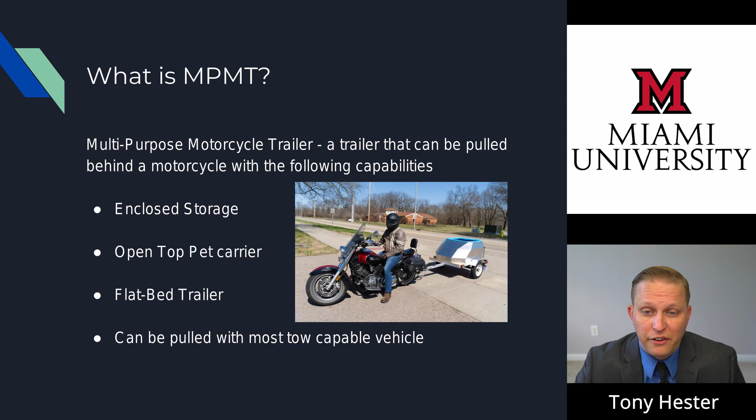During research, I could not find any products that matched what I was looking for. Products found were either bulky or made completely out of fiberglass and would provide no protection to the pets in case of an accident. Because of this, we thought it would be good to design our own trailer.

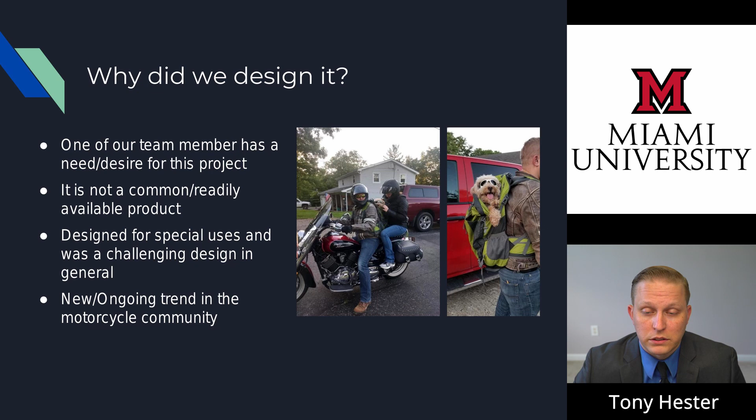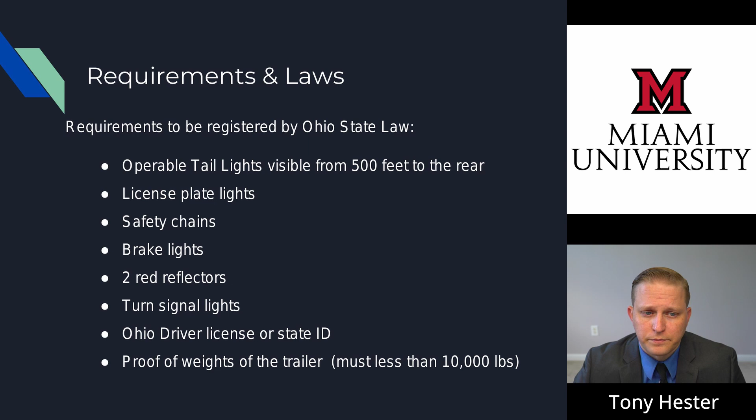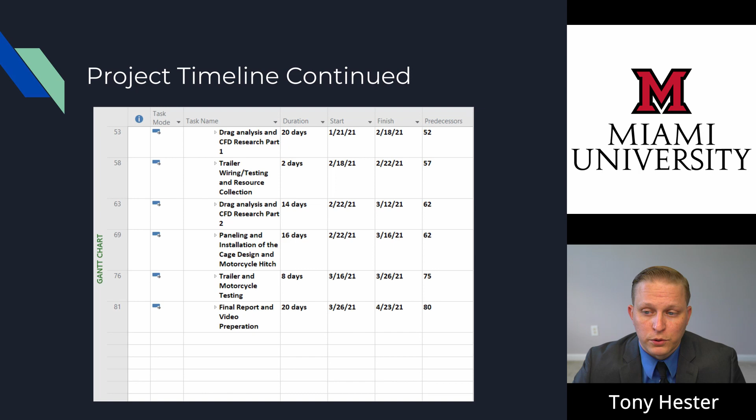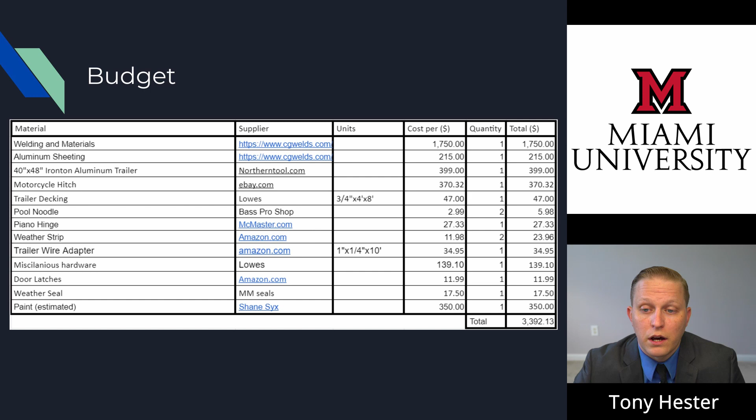We designed a scaled trailer model that was modeled to be a replica of the actual trailer, and this was done inside Autodesk Inventor. The structural cage was designed using Autodesk Inventor's cage design feature.

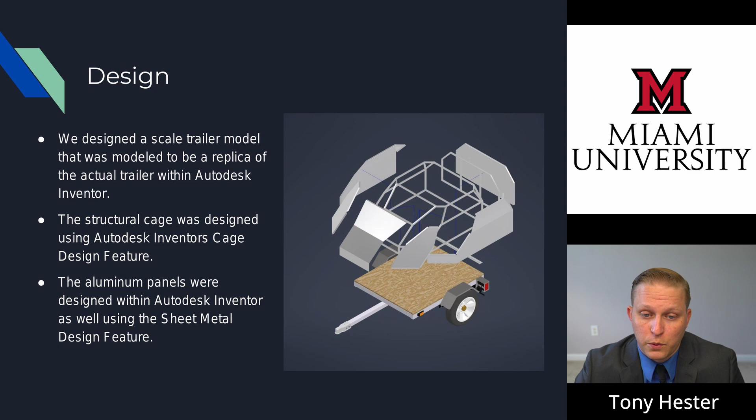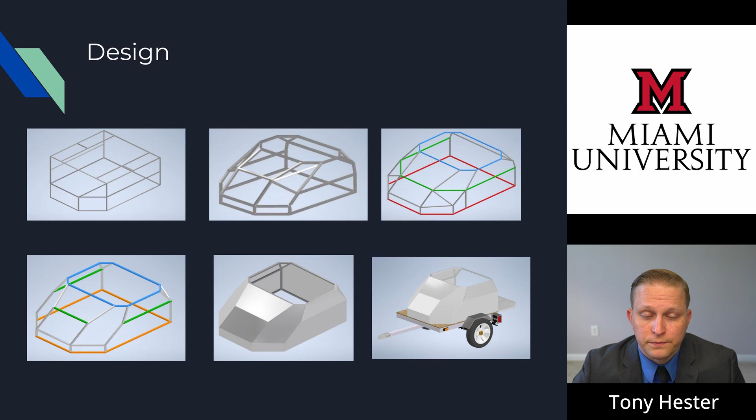The design has a skeletal cage comprised of 3/4-inch aluminum square tubing and 20-gauge aluminum sheeting. The cage can be easily attached and removed from the trailer by one person. A lid was designed so that we could use the trailer for dry storage, and a tailgate was designed to allow safe and sturdy loading of the animals.

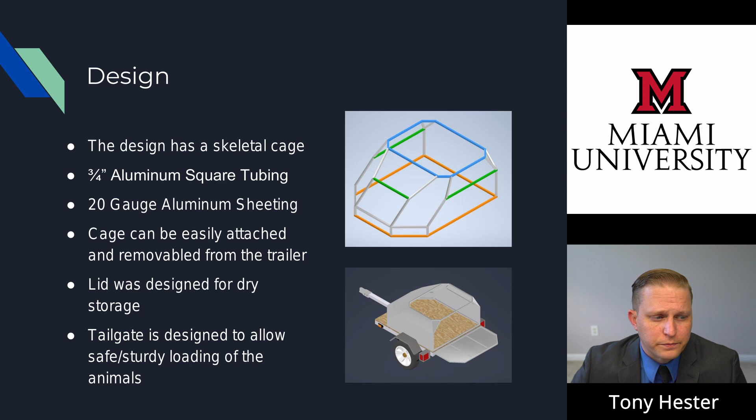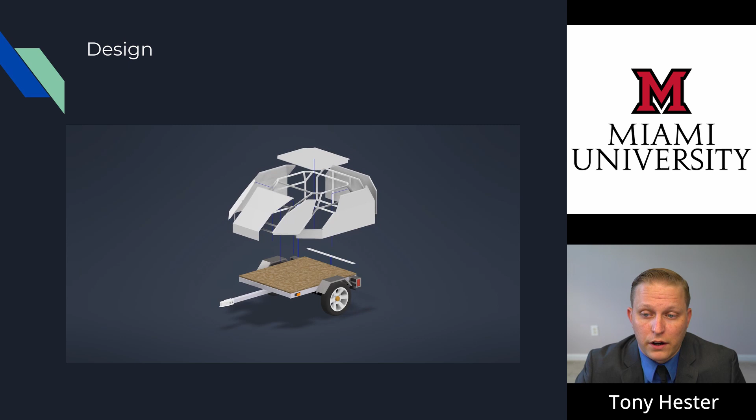This video shows an animation of the exploded view involving all of the components of our design inside Autodesk Inventor. Next, William will discuss the assembly process.

For the assembly process, the hitch was purchased and is specifically designed for a Yamaha V-Star 1100 motorcycle. The hitch was installed to the frame of the motorcycle.

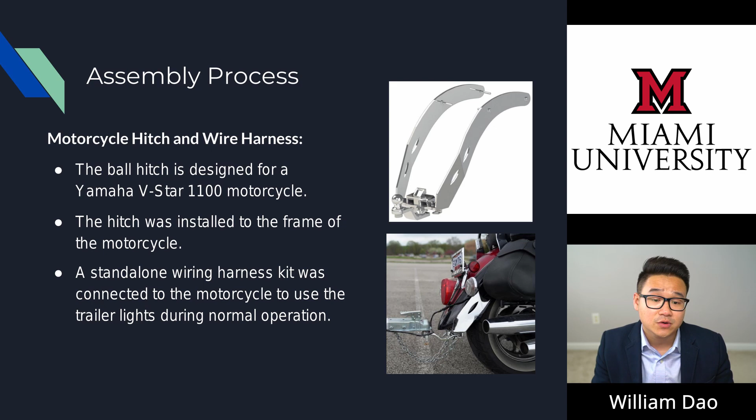The ball hitch allowed the motorcycle to have a good amount of lean angle when turning. A standalone wiring harness kit was connected to the motorcycle to use the trailer light during normal operations.

For the trailer assembly, we purchased a 40 by 48-inch pre-built aluminum trailer kit from Northern Tool Equipment. The trailer kit came with reflectors, running lights, license plate lights, signal lights, brake lights, and a wiring harness.

We soldered the wiring harness for the lights, heat shrink wrapped them, and securely tightened them to the trailer frame. We put a 3/4-inch thick weather-resistant plywood on top of the trailer to use as the trailer base.

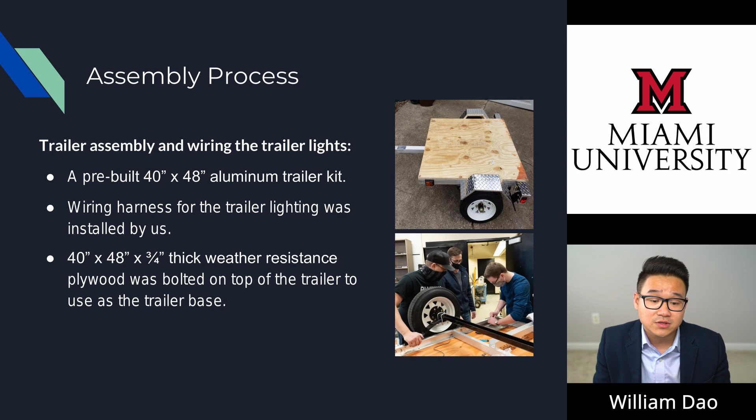Moving on to the cage frame assembly. The cage fabrication was outsourced to CG Welds for welding using 3/4-inch square aluminum tubing.

Additional 3/4-inch aluminum flat bar was added to the cage to provide more support for the aluminum panels. We added a total of 4 1.5-inch square tabs to the bottom of the cage to securely bolt down the cage to the trailer baseboard.

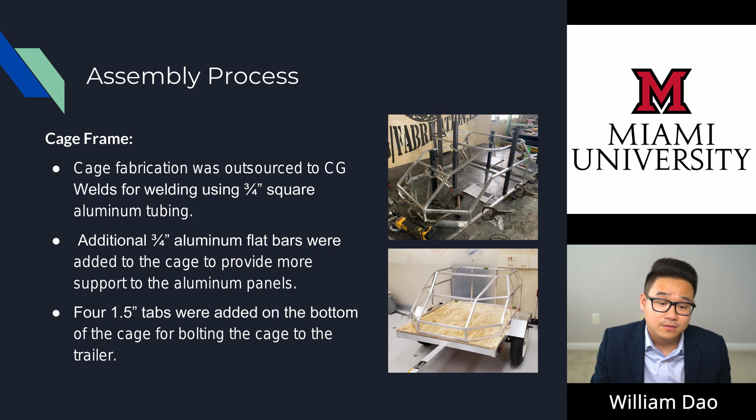Moving on to the panel assembly. The first attempt of making the panel template was using cardboard to form around the cage frame. This was a failure because the cardboard was very flexible, but we did learn a lot during the process.

The final attempt of making the panel template was using poster board instead of cardboard. This gave us a more accurate fit and dimension of panels. We then traced the template on a 20-gauge aluminum sheet for cutting.

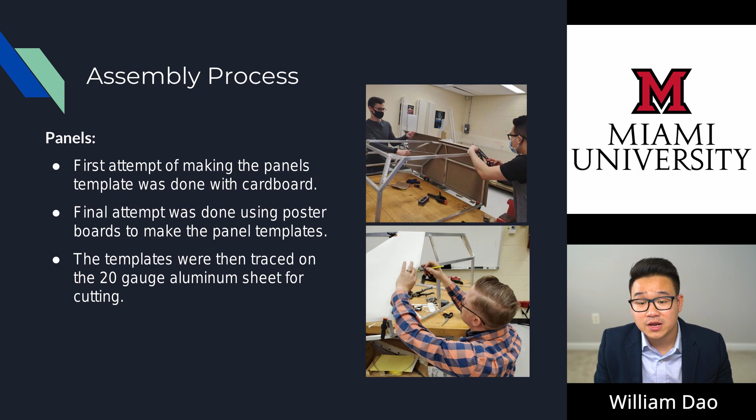We used electrical sheet metal shears and aviation snips to cut the aluminum panels. The panels were formed using a metal brake, shaping hammers, and rubber dead blow hammers. The panel was then securely attached to the cage using stainless steel sheet metal screws.

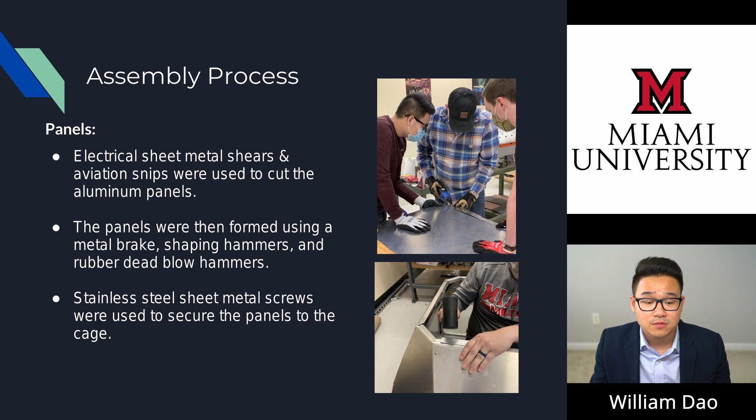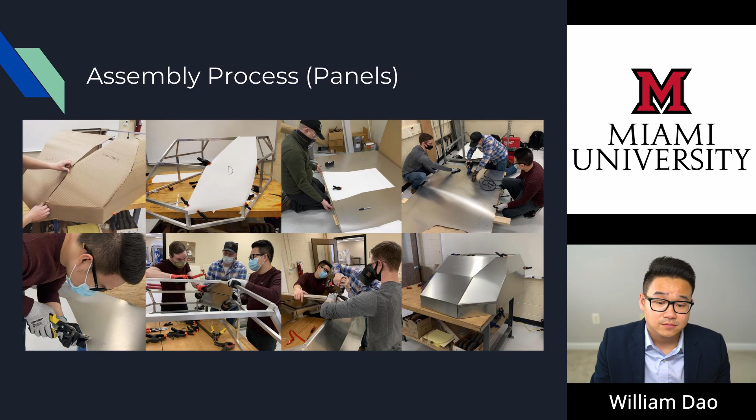Moving on to the lid assembly. We made a lid to bolt on top of the cage via a rivet nut, so we can use the trailer for dry storage. The lid was made from a 1/4 inch thick polycarbonate sheet.

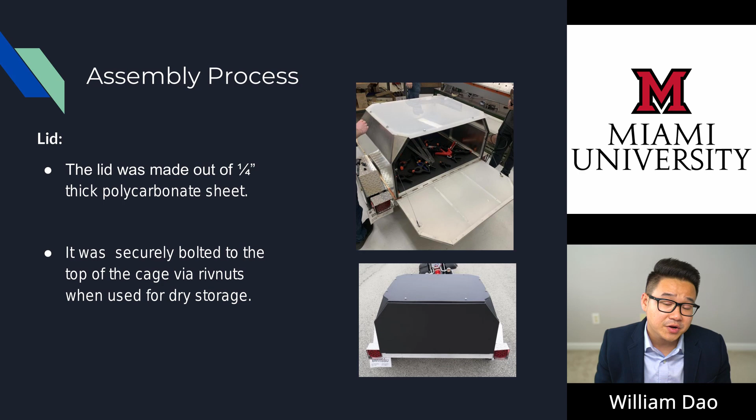For the door assembly, the door frame was also welded by CG Welds using 3/4 inch square aluminum tubing. The outer door panel was installed with 20 gauge aluminum sheet using self-tapping screws. The inner door panel was riveted with an 1/8 inch thick polycarbonate sheet, and we glued a rubber padding on top to provide better traction on the surface.

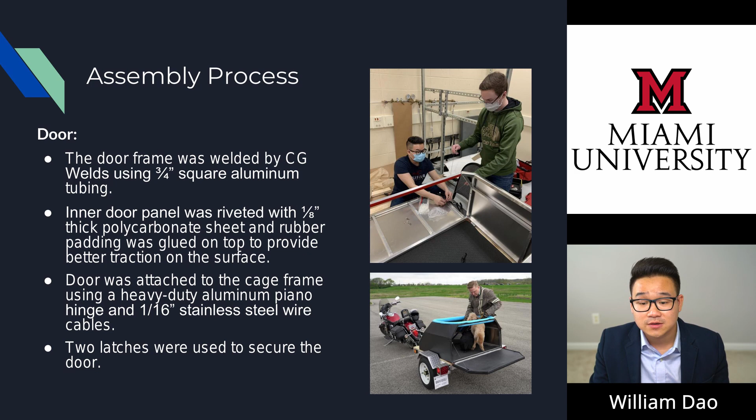The door was attached to the cage frame using a heavy-duty piano hinge. We used 2 stainless steel wire cables to hold the door as a tailgate, and 2 latch locks were used to lock the door in place. Here are some images of the working process on the door assembly.

Moving on to the weather sealing. A 1/4 inch thick rubber strip was used to seal up the gap between the door and the cage. Additional seal was added as well to ensure watertight seal between the door, the lid, and the cage. To seal up the gap between the panels, we used all-weather resistant silicone on the inside of the trailer.

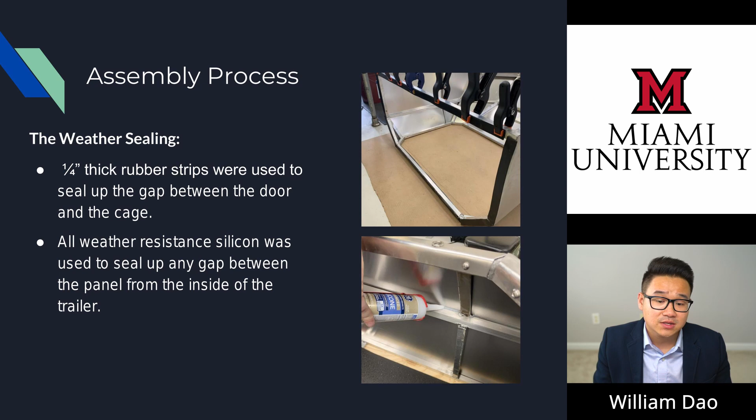Moving on to the padding and protection. We used a 3/4 inch thick soft rubber foam mat on top of the trailer base to have some cushion protection for the dogs. A thick foam pipe insulation was used to wrap around the top of the frame to give protection for the dog's head and neck.

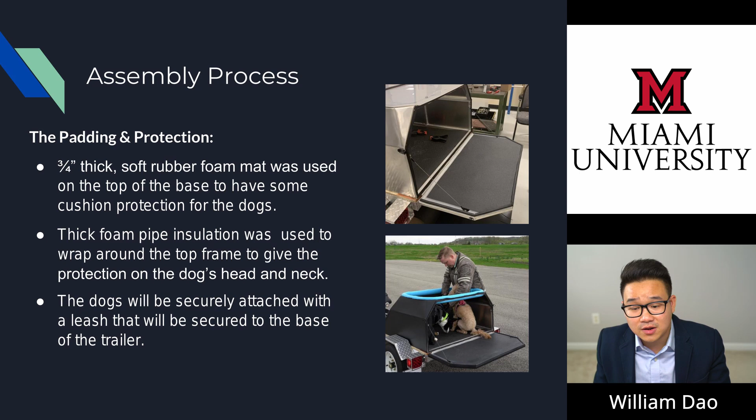The dog will be securely attached with a leash that will be tightened down to the base of the trailer. This will prevent the dog from being able to jump out of the trailer when moving. This way the dog will be safe and be able to lay down if they need to. Here are some images to give a closer look at the sealing and padding protection.

While we were testing the trailer under bright sunlight, we found that the aluminum panels were very shiny. So we sent the trailer out to paint, which makes it safer when pulling the trailer on the road. And overall, we just wanted to have a more finished look for the trailer.

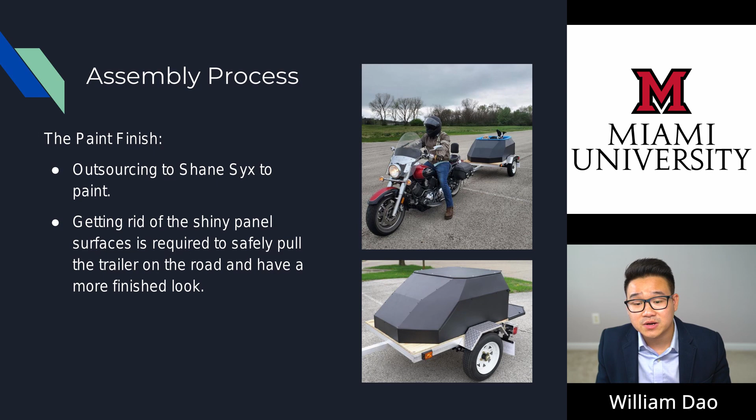Moving on to the analysis portion of our presentation, we conducted various forms of engineering analysis within our project. This includes a finite element analysis, a computational fluid dynamics analysis, and a wind tunnel analysis, with the purpose being that we wanted to gain a better understanding of the aerodynamics, drag and lift coefficients, drag and lift forces, and the strengths and weaknesses of our design.

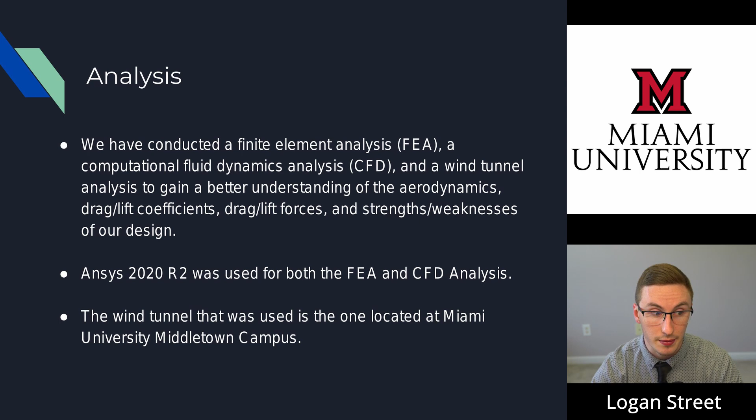In order to do this, we used ANSYS 2020 R2 for both the finite element analysis as well as the computational fluid dynamics, one using the static structural function, another using ANSYS Fluent. The wind tunnel that we utilized is the one located at the Miami University Middletown campus as well.

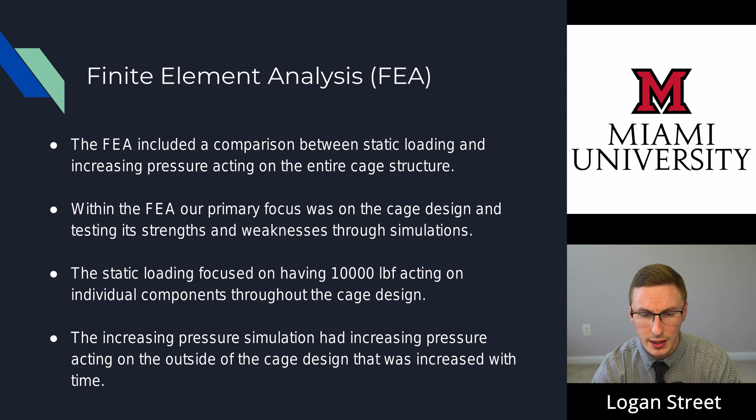The finite element analysis included a comparison between static loading and increasing pressure acting on the entire cage structure. Within the FEA, our primary focus was on the cage design, testing its strengths and weaknesses through simulations. The static loading focused on having 10,000 pound force acting on individual components throughout the cage design, while the increasing pressure simulation had increasing pressure acting on the outside of the cage design that was increased with time. The range for this was 0 to 100,000 psi.

In the following video, we are showcasing the increasing pressure simulation. As we can see, as the pressure is increased with time, we do have some deformation that occurs.

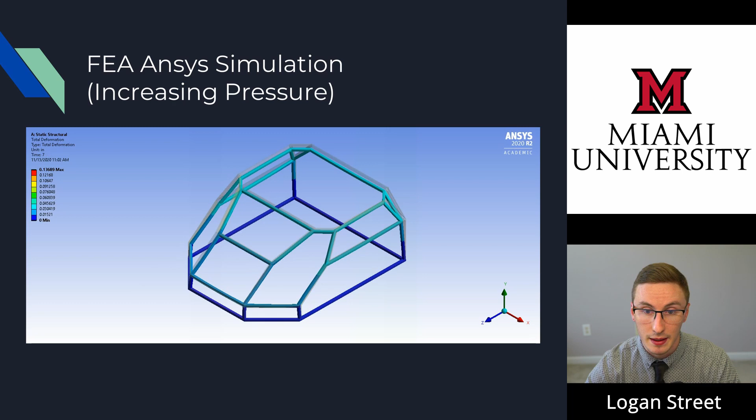Moving on now, for the computational fluid dynamics analysis for this project, we decided to conduct a symmetrical analysis using a simplified trailer model. We made the simplified trailer model using Autodesk Inventor, and then we refined the model using ANSYS SpaceClaim prior to conducting the analysis. The reason we did a symmetrical analysis was to reduce the total computational time, since we were going to run multiple simulations.

Within ANSYS Fluent, we made use of 2 physics models for comparison purposes to validate the results, as well as check for any discrepancies between them as we collected data. The models that we used include the K-omega SST, as well as the K-epsilon with enhanced wall treatment and realizability. The reason we utilized these models is because both of them are for turbulent flow.

Since, as I mentioned previously, we conducted multiple simulations, we did this to address various speeds at which the design will experience while it is in operation. These speeds include 5 miles per hour, 10 miles per hour, 15 miles per hour, 25 miles per hour, 35 miles per hour, and 45 miles per hour.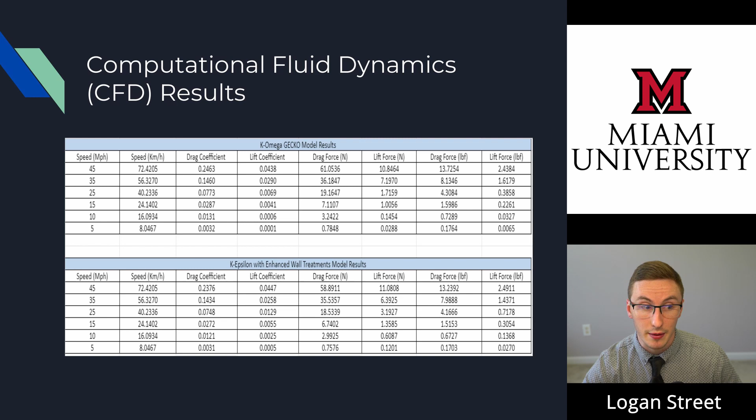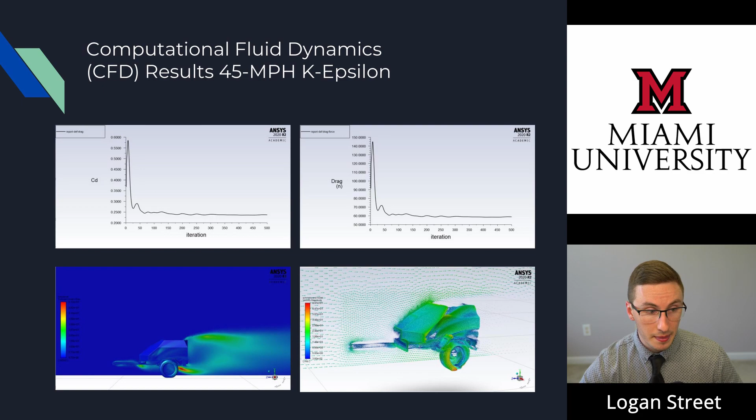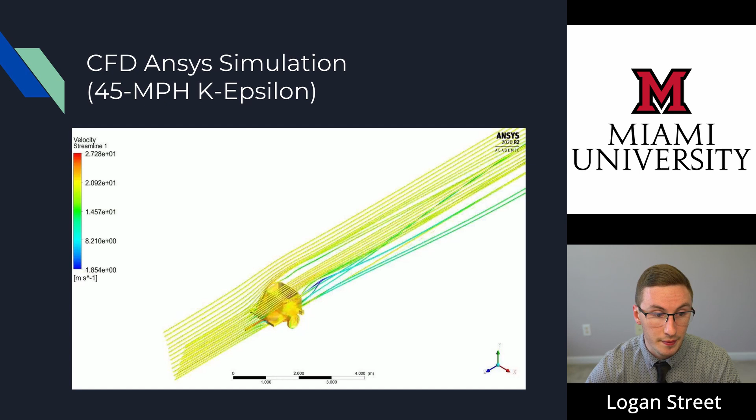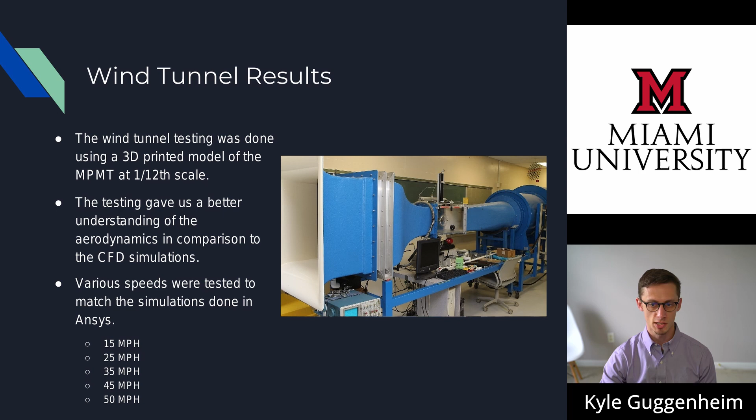To start the wind tunnel testing, we had to fix and modify the wind tunnel. It needed a new smoke machine, and the smoke inlet pipe needed to be modified for better smoke distribution. The wind tunnel testing was done using a 3D printed model of the MPMT at 1/12 scale.

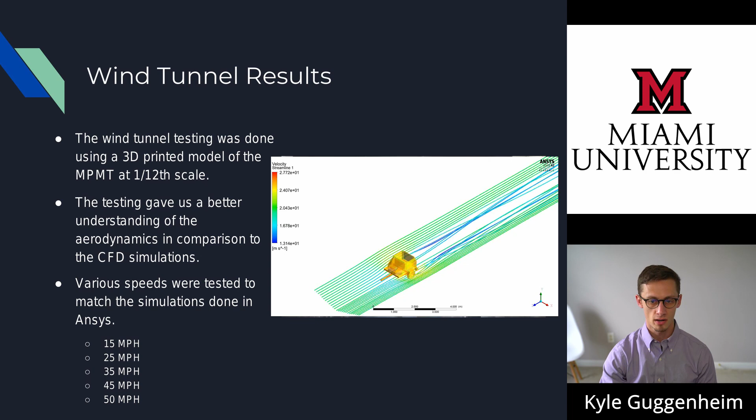The wind tunnel testing gave us a better understanding of the aerodynamics compared to the CFD simulations. To better compare the two, the 3D printed model was made from the same file and tested at the same speeds of 15, 25, 35, and 45 miles per hour. An additional speed of 50 miles per hour was done to test the performance of the wind tunnel.

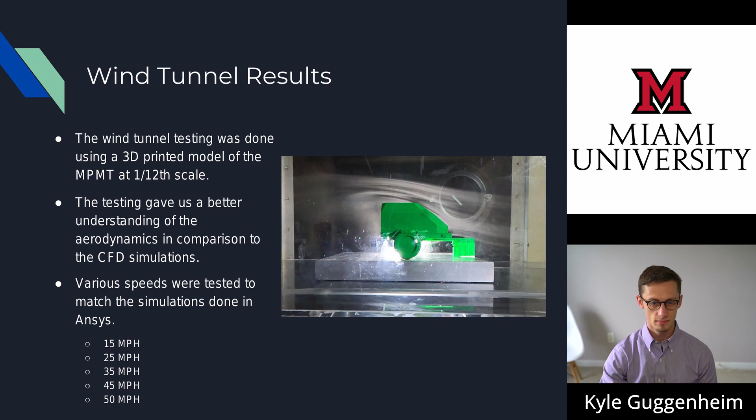In the video, we can clearly see the wind tunnel test shows high turbulence directly behind the trailer. This can be compared to the CFD simulation, where we see the same results. We can see a light disturbance in the airflow behind the trailer at 15 miles per hour, and as the speed increases, the disturbance becomes more intense.

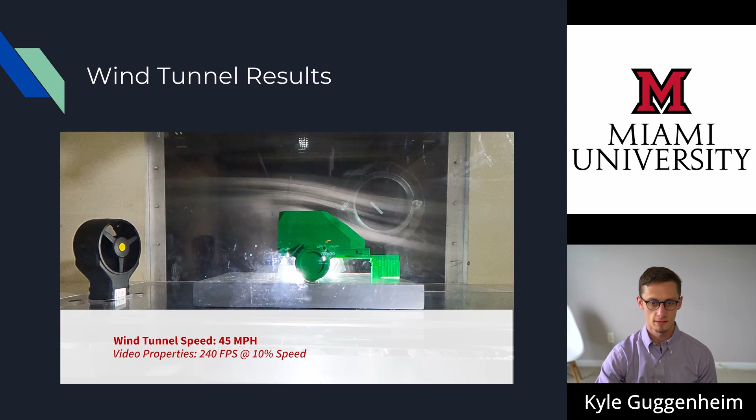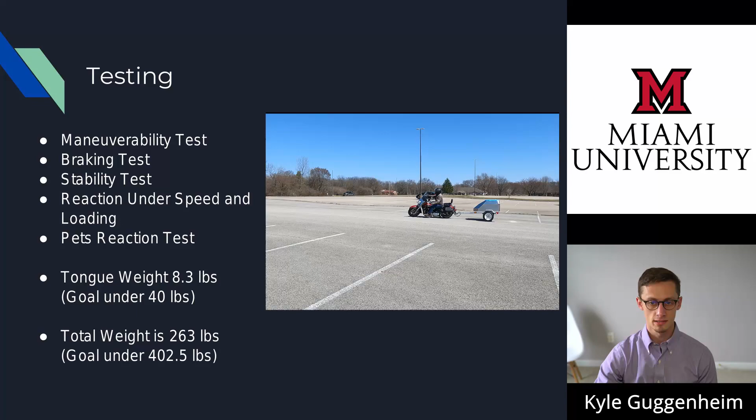Once the trailer was assembled, we attached it to the motorcycle for testing. The testing points we were looking for were maneuverability, braking, and stability. The trailer tongue weight is 8.3 pounds, which is under our goal of 40 pounds. The total weight of the trailer is 263 pounds, which is under our goal of 402.5 pounds.

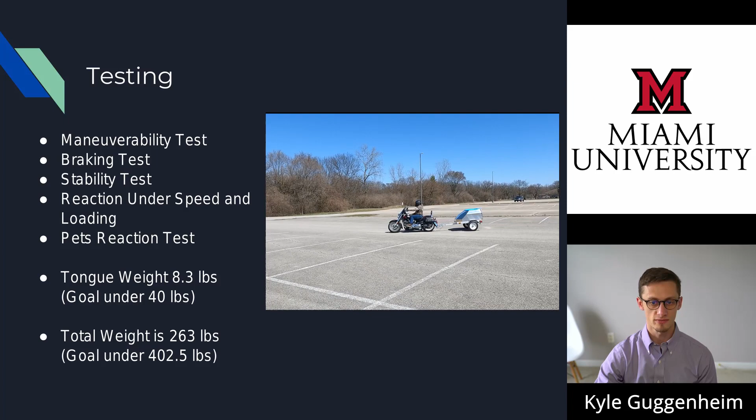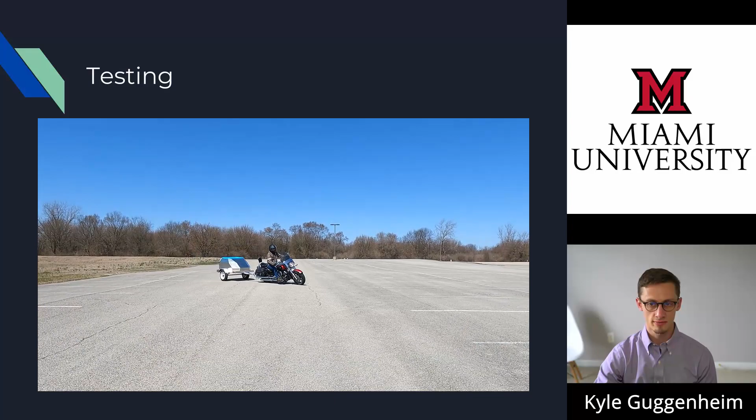Riding the motorcycle with the trailer felt light and simple to handle. Tony could not tell any difference riding with the trailer behind him, and when braking, he could not feel any difference with or without the trailer. Since the trailer is wider than the motorcycle, Tony noticed he will have to maintain positional awareness of the trailer while riding on the street.

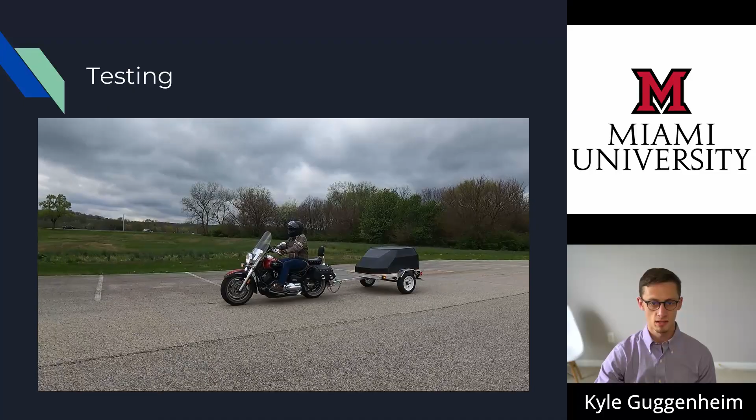Typically, motorcyclists ride in the left or right half of the lane. While pulling the trailer, he will have to stay closer to the center of the lane.

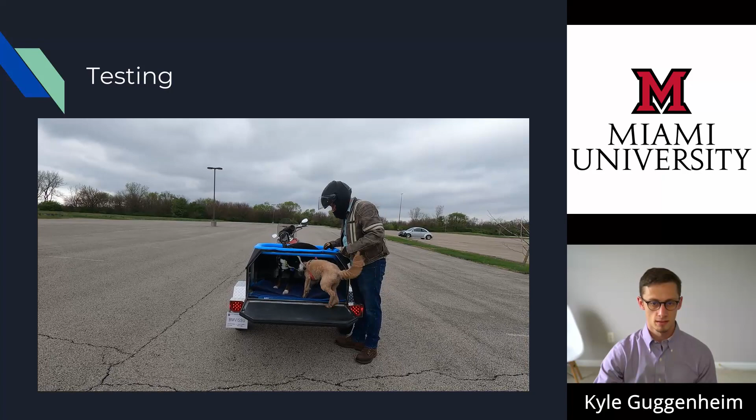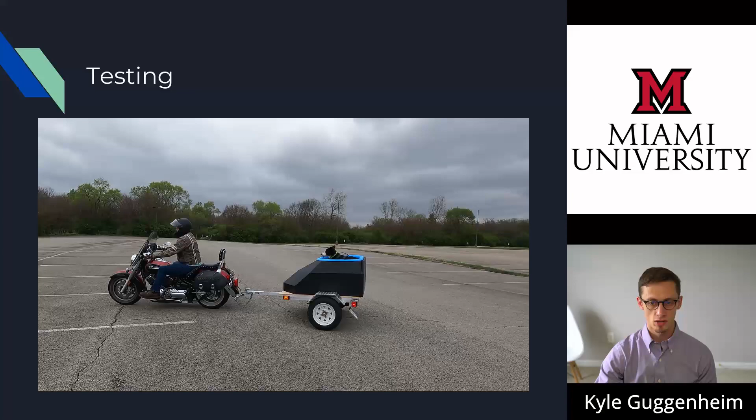To get the dogs more comfortable with the trailer, Tony started by training them to jump in and out of it. Then, to have the dogs ride in the trailer, he started by riding at very slow speeds with people close behind him for safety. The dogs seemed very nervous at first, but slowly became more comfortable riding in the trailer.

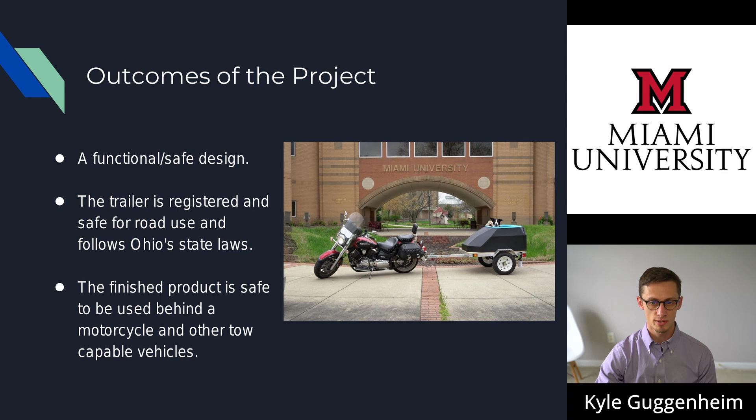The outcome of our project was a functional and safe design. The trailer is registered and safe for road use and follows Ohio state laws. The finished product is safe to be used behind a motorcycle and other tow-capable vehicles.

For future plans: more testing to address road performance and stability once road testing can be conducted; potential continuation of CFD to compare more physics models and gain a better understanding of the aerodynamics of the design; an altered trailer frame to follow the footprint of the cage; addition of a windshield to protect the dogs during higher speeds; and axle-less suspension to improve ride quality.